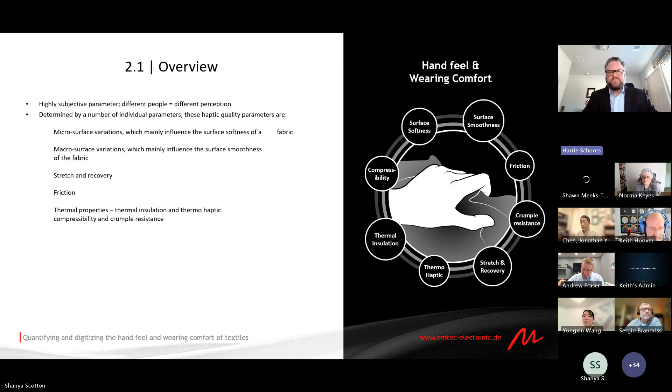Now, one thing I want to make sure everyone knows - this is for fabric only. This cannot be done on yarn by itself, but the yarns within the fabric obviously make a big difference in the ultimate results. If we go back to the basics, I wanted to know what each one of these 8 parameters represents when a consumer is touching fabric.

I've tried to show that over on the left here. The scientists from Emtec, based in Leipzig, Germany, who've been working on and making this machine for the paper industry for over 25 years, got me some pictures as well. I love that second column, it gives you an idea.

One of the most remarkable and useful tests is called crumpability. The first thing one does when touching fabric is touch one side with one finger. The second thing is you grab both sides and move your fingers. Eventually you grab the fabric and crumple it in your hand. The measurement is the resistance the fabric gives to crumpling.

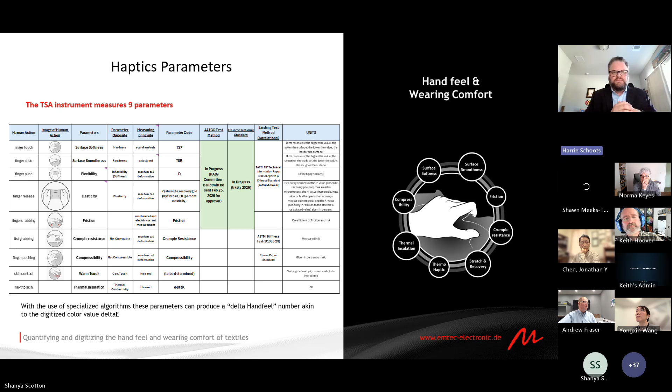Okay, so we'll move to the next slide. Oh, there's another question in the chat. Okay, go ahead. Yeah, does the base fabric affect softness when comparing? How do we factor this in for Handfeel?

A number of variables that affect softness are actually almost all of these things right here that are listed with the red star and smoothness. Softness is affected by an enormous amount of variables. Twists per inch, the yarn count, the staple length will affect softness. Texturizing, obviously, right? Open end or not, having a softener on it, having been dyed black with 5% dye instead of 0.5% dye for a light shade. These will all affect the softness.

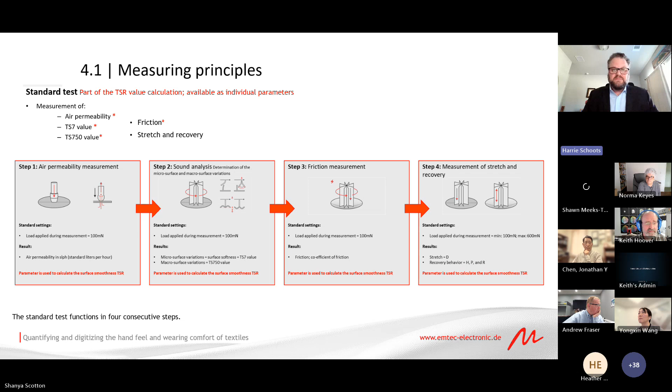And so every fabric has to be measured. There's very little that you can actually transfer over to another. I'm going to show you an example of about 45 base layer fabrics that were all measured and compared to each other on a couple of variables. And then you'll see how much difference you can see between some of these things. What I wanted to show this slide for, and believe me, if you want to get into the depth of how this works, what's the technology behind it and the mechanism, there's a tremendous amount of data. All right, slides, like 80 slides long about just each one of these parameters and how they're measured.

Air permeability is part of the measurement and algorithm of softness, and it's part of smoothness too. There's an overlap—sometimes one thing is done to measure another. In this case, air permeability is one of those, and that breathability variable is an important part of the next things that are measured.

So very unique here in step 2, the thing I love most is that they use sound to measure the surface, to basically wrap around the fibers and all this. The sound measurement is so accurate that it can determine a repeatable, detailed, precise measurement of everything from pile to pilling. So if you wash something or ran it through a Martindale for 50,000 cycles, you could measure it through this sound system, and it will tell you how many pills you have based on the size of the pilling and the way the sound bounces off of those things.

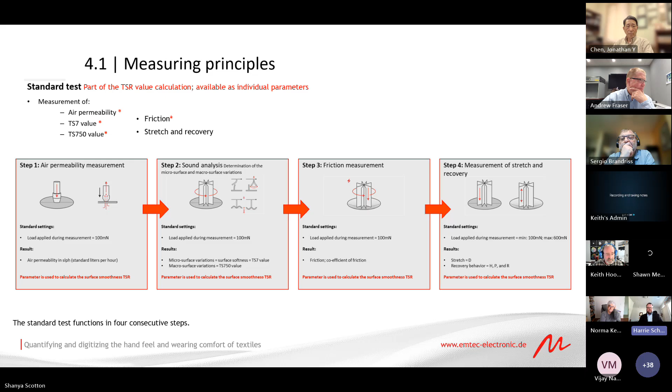I have a case study, and this is where the audience will see things they've never seen before, because this data is only a few weeks old. That's been one of the problems with this whole hand measurement world, it's hard to talk about because we always want to compare things. We want to see, soft compared to what. So that's what I'm trying to do, translate this to our audience.

So the swimwear liner is a very interesting business because, and I didn't know this, but swimwear has two layers in many cases. Like a one-piece women's swimsuit has an outer layer that you can see and touch on the outside, but a different fabric on the inside, the part touching your skin. You never touch one side of that inner liner, it's sewn up against the other side. So the side designed to be up against the skin is very important to know.

These were all measured dry, by the way. That gives me a chance to tell everyone this can be done wet as well, because that changes everything. We all know a swimsuit stuck to your skin feels different than a dry swimsuit, and that can be done here. What you're going to see is knit fabrics that are polyester and recycled polyester, nylon and recycled nylon, I think mostly nylon 6/6, and they all have some portion of spandex. I don't have a relationship between the spandex content and the end results for you, but I do have a relationship between smoothness, softness, and fiber type. So it's a very interesting case study.

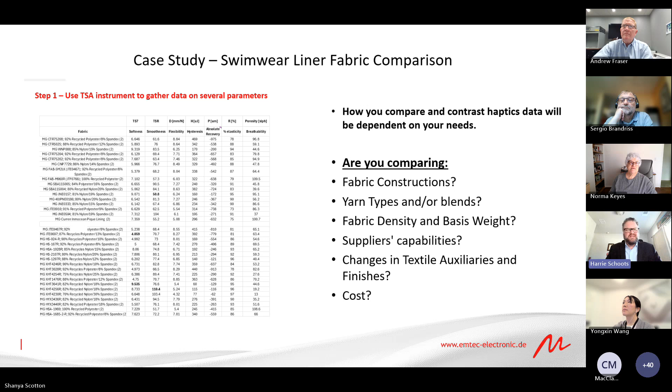So we took all this data and I charted it. Now the charting, I love 4-block with 4 square charts. This is the way we should be looking at everything, in my opinion. The question is, what's the X axis and what's the Y? That's the only question. But we should always look at things in something like this, because this separates the story so well for people, especially if you're trying to explain to your boss what's going on.

And they see financial papers all day, and then all of a sudden there's somebody talking to them about softness of fabric. I put the y-axis here as smoothness and the x-axis as softness for that list you saw earlier. These are all for the same end use, everything you see here.

The most important thing people usually want to know is how far do you have to go in this scale? And you'll notice, by the way, the X scale is different numbers than the Y scale. I believe someday we're going to normalize all these numbers so they can be shown on a chart better and the vectors can be created. But about a 10% difference is noticeable by the consumer. So if you see something on the right side of this...

The other thing is softness is an indirect variable. So not just English cotton count now being indirect, but softness as well. I think I'm voting to turn that around and just change it, while we can, so a bigger number is better. But at this time, the softness number itself, because of the way sound works and the permeability, the bigger the number, the more the sound is bothered, I guess, or maybe it's smoother. I'm not sure exactly.

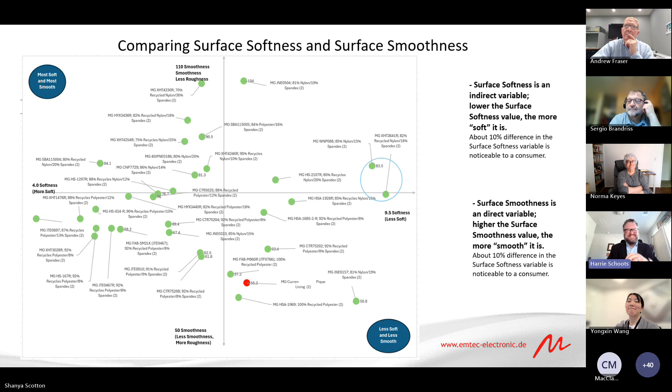What's the most soft — polyester, and this is texturized polyester, or nylon 6/6 texturized? Polyester. Carla, you know this answer. You're right, it is. So let's go to the next slide.

And you'll see over on the right side, most of those are polyester. And if you look even deeper, you would see that they're mostly recycled polyester. I thought that part was pretty interesting, and obviously we should be doing research on recycled content.

Like I said before, whenever you sell additives or yarn, ingredient items to fabric and garments, you're always just trying to say, use my stuff, it will not negatively affect you. Another way of saying it: it'll be price neutral — that's the other way we say things. But a recycled polyester in this particular case is not negatively affecting the surface softness, and it's actually the best. I don't know if there's an actual correlation there, but it certainly comes out versus nylon as being more soft.

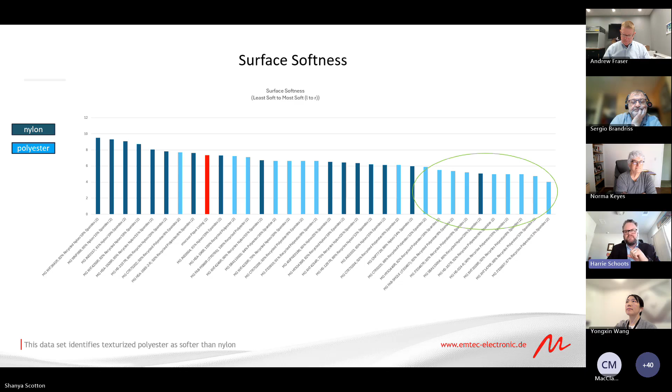So go to the next slide. I just normalized the smoothness, which is in orange, on top of the softness ratings, which are those darker bars, the blue, just to show you that these are not related. It's a very important takeaway from today's meeting that the variables in the parameters of haptics are not really related. They are independent enough that this company decided to make them independent variables.

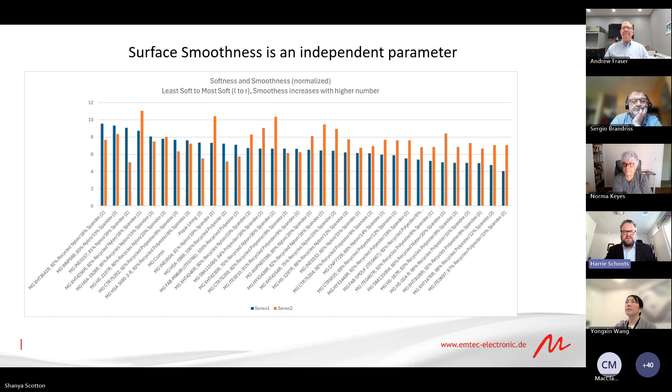The orange bar is just kind of showing you that it's just not related — they're kind of random. There could be a relationship here to amount of spandex, maybe. It could be a relationship to density in the fabric, but I didn't have that data. Tina, I will tell you that you're about to be right about the smoothness rating.

So we'll go to the next one. So here we're seeing smoothness. It is a direct correlation, meaning the bigger the number, the more smooth. The dark blue is the nylon, and that one came out even more as the smoothest.

To be honest, what I would want to know is what that one on the left is doing — that would probably tell you something. That little guy missed the party, and there must be some very big difference between that one and all the others. I think there's somebody on the call that might know that, but otherwise, it's stuff like that that's kind of interesting. It empowers you as a buyer or user of fabric to know what you do. And of course, on the base layer material that's up against your skin, smoothness is an important variable.

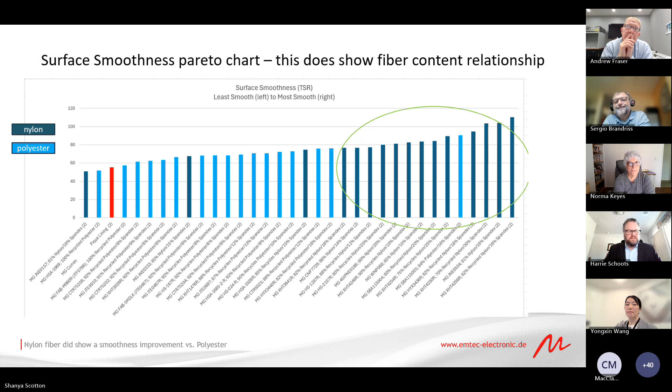Right, we'll go to the next. So, of course, you could have checked any of the variables. I'm just throwing up flexibility here. Flexibility is also linear and direct. It is the blue column going up. Most of these things are pretty similar in flexibility.

It is not stretch. Okay, so percent elasticity is measured by this instrument, and that is normalized here. It is normally out of 100, so you would measure percent compared to where you were drawn from. It's very similar to what everyone here knows. And so it was divided by 10.

If you look at the orange bars, that's the normalized percent recovery. And you'll see some of them are close to 100%, but some of them are not. And not exactly related to the nylon. I have a feeling in polyester, it's more related to the spandex. And if we were to dive into this, you'd probably see that they're all pretty close in spandex quantity, and that's what you'd probably discover. And of course, that's what you would expect from having 18% spandex.

And Heather, yeah, the flexibility answers some of the drape questions. People have all sorts of funky drape tests. I used to do one where you pushed it on a tabletop and measured how it fell. Was that, Norma, did you used to do that?

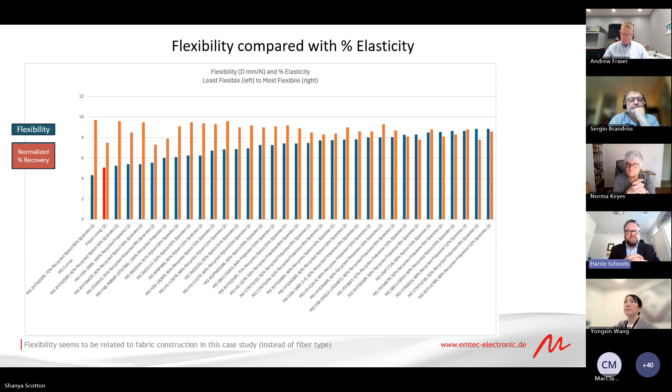All right, so next. I think that was the data I wanted to show. Yeah, so again, like I started, color is a big part of the consumer's dollar. Hand is the next, but we've never really truly done this, right? We've never all just stood around talking about newtons or softness, that kind of thing.

I think we should, and I think it's coming. So regardless what anyone does here after this meeting, I believe that in 10 years or less, everyone will spec this, and your mil specs, your tech packs will have these numbers in them. And I think it's just better to know about it now than to wait and catch up like most of us did with color.

I got the experience of introducing spectrophotometers into 3 locations in the first 3 jobs I had. And I can't tell you how much grief I got. It wasn't even my money. I was just some young guy from NC State that came over working in a factory in Western North Carolina. And I was mortified at the resistance to the spectrophotometer.

And we used to take the yarn. If it didn't read the color you wanted, you'd blow on it, and then you'd take that yarn and put it outside in what we called the magic bush. It was a fern that we had, and then you'd bring it inside and read it again.

So I think we're going to go through that in our industry here with haptics, but we're a little bit further down the line with things like virtual haptic libraries where people can compare and share and learn how these things relate to real people touching something. Perhaps we're a little bit further down the line for the magic bush treatment.

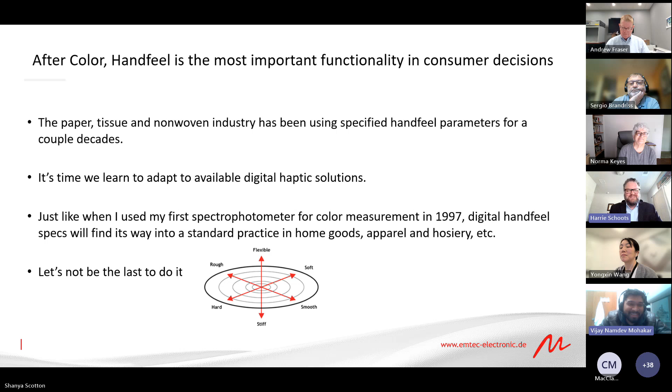But it does exist. And yeah, this is like the $1 million question, Vijay. With all the data, we'd all be all set. But nobody's going to get data if they don't know how to use it. And which is going to come first, right? So yeah, this is...